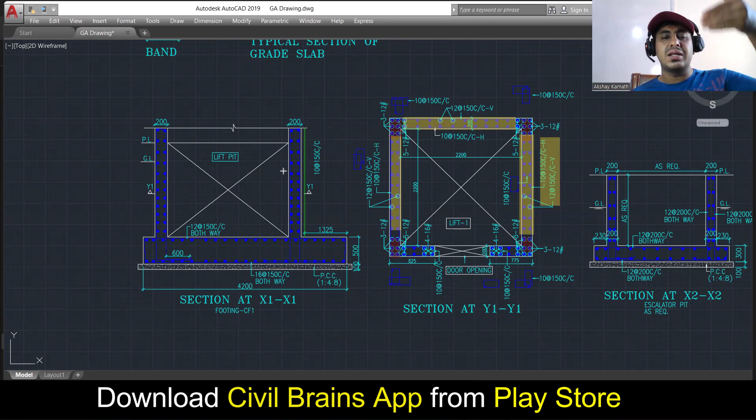So whatever is a wall reinforcement, that is mentioned here, how you are supposed to put the wall reinforcement. We'll see that. Same thing, they have shown that through a section here. Your wall reinforcement will be like this. And this wall reinforcement will go inside the column. Wall reinforcement will go into the foundation. This is how the bars will come. This bar will come like this. Okay, great, fine.

Now we'll try to understand here. Here you're supposed to provide a kind of a column. There you're supposed to provide 12 diameter. These are the 3 bars, and these 5 bars, 1, 2, 3, 4, 5. These are your 12 diameter 5 bars. So 5 plus 3 is 8 bars. Altogether, you will be providing 12 diameter 8 bars here, and then it will be connected with the lateral ties.

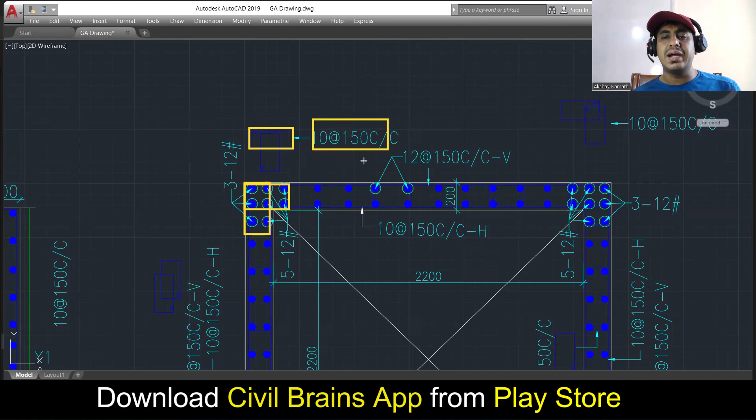So these lateral ties will be connected like this. This is one lateral tie, so it will be connected like this. Another lateral tie will be connected like this. So this is what you understand by this particular lateral tie. Which diameter? 10 diameter at 150 center to center spacing. Understood? In the same way, again here also the same thing.

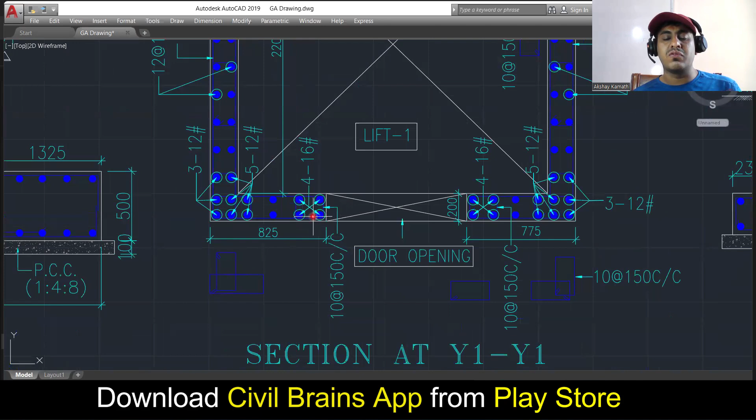So this much reinforcement you are supposed to provide. 5 and 3 is 8. So altogether 3, 3, 6 plus 2, 8. 8 number of 12 diameter bars you are going to provide. And then it will be connected with the lateral ties in this direction and in this direction, that is mentioned here. Same thing here also, another 4 number of 16 diameter bars you are supposed to provide here. 16 diameter 4 bars you will provide here.

This is a door opening from where you will enter into the lift. And then this is one reinforcement here, another reinforcement here. This is understood. Now come to the wall reinforcement. All these are your wall main reinforcement, which will come vertically, and then this will be a horizontal reinforcement. So that is why it's mentioned here that your main reinforcement, this one, is your vertical reinforcement. You can see the dotted bar shown here.

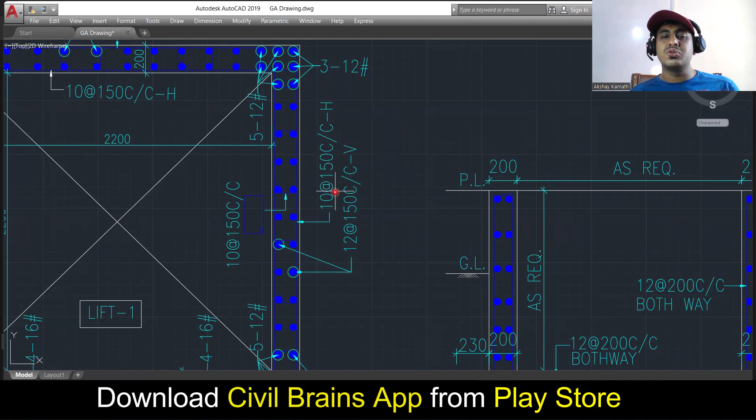You're supposed to use a 12 diameter bar, and the center to center between two verticals will be 150. V means it's a vertical reinforcement. H means your horizontal reinforcement. So vertical will go like this, horizontal will go like this. For horizontal, you're supposed to use a 10 diameter bar, and the center to center spacing will be 150. So it's written horizontal. That's it.

So whatever I explained to you in the previous video of my basement plus ground plus 3-story building, the same lift you're supposed to give. The only thing is here, at all 4 corners, your columns are going to come. Here also a kind of column reinforcement will come. That's it. Understood, right? Fine. So this was all about the lift reinforcement.

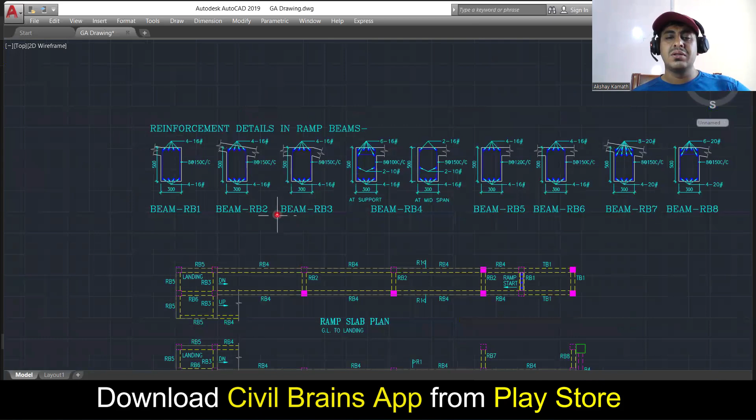Now we'll get into the plinth, this thing. What is that? Tie beam. Tie beam and plinth beam both are the same there. They have mentioned tie beam, that is fine. So for the tie beam reinforcement, you know how to read. I'll not explain it again.

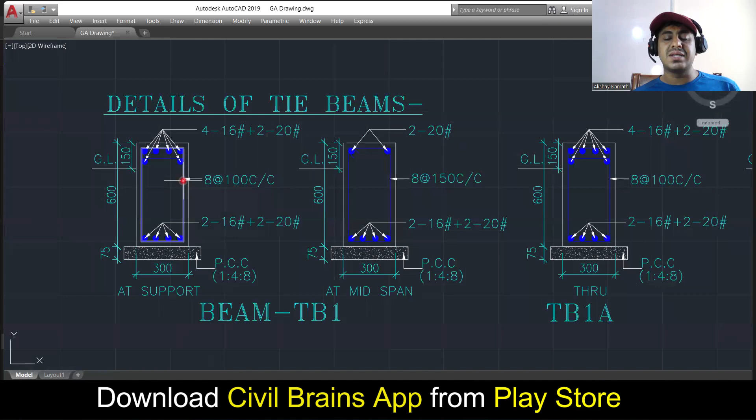Same thing here. Beam, tie beam, TB1. So you're supposed to provide a 16 diameter 4 bar at the top, then another 20 diameter 2 bar in the second layer. So all these are your 16 diameter 2 bar and 20 diameter 2 bar. So 20 diameter 2 bar will be at the outer face, and 16 diameter 2 bar will be at the inner face. This is your lateral ties, the stirrup, which you're supposed to provide 8 diameter bar at 100 mm center to center spacing. That's it.

Rest all things you know. You know how to read. I'll not explain the same thing.

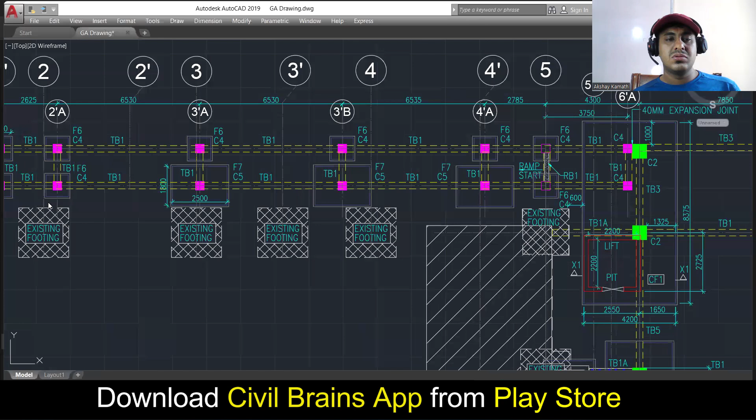Then after that, you are supposed to provide a ramp. So this is how the ramp will look. So your ramp will start somewhere from here. We can see here, so ramp is going to start here. So ramp will be something like this. Okay. So ramp will go like this always. Okay, ramp starts. This is how the ramp will look. And for that, they have given the reinforcement here.

This is a plan for the ramp. Your ramp is going to start from here. So it will go like this, and it will go up from here. Okay. So this is a ramp plan what they have given.

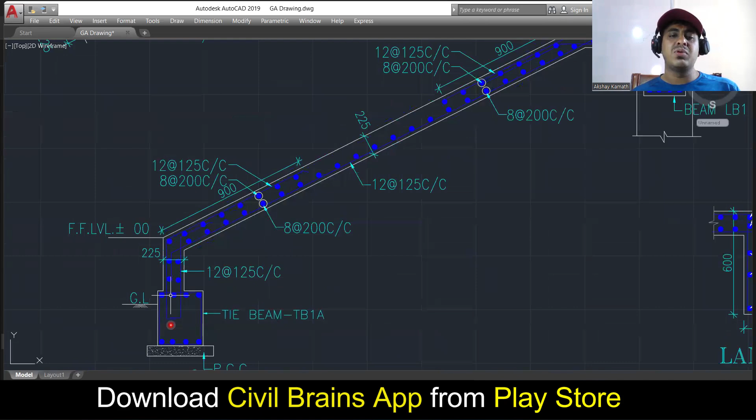This is your tie beam. From the tie beam, your staircase reinforcement will start, and we will bend it like this and take it like this. So since it's a big staircase, we have given 2 landings. One landing is here. Next landing will come in this direction. See, one landing is this one, then another flight and another landing will come here. Got it, right? So this was about the staircase details and the ramp details. And apart from that, that's it.

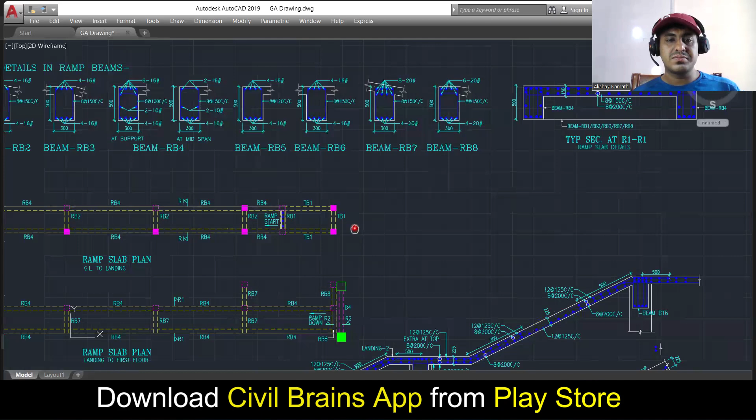Okay, so this was all about the tie beam details and staircase details I've explained to you. Everything is covered, nothing is left out. And last we'll go to the slab details. So slab details, already I've explained you many types of slabs. So here again, this is a complete slab plan, what they have given. So these are the different slabs what you have.

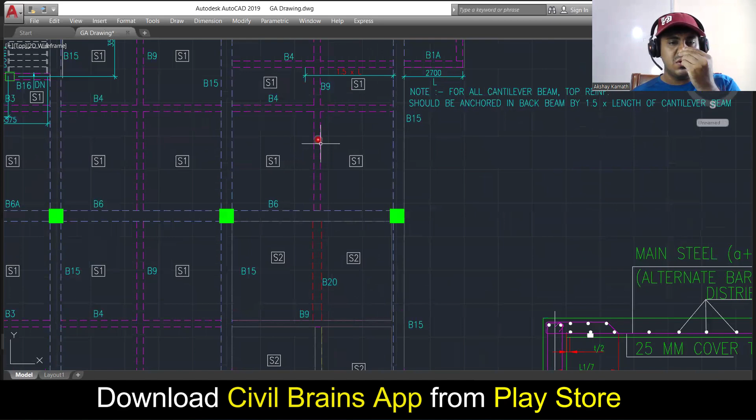See, all these are the beam layout, B1, B2, B3 and all. And everywhere the slab is given, like S1, S1, S1 is one group of slab. Apart from S1, we have another group of slab, that is S2. So for everything, they have mentioned it here. If you're using an S1 slab, the thickness should be 150. If it is S2 slab, it is 150. Both are two-way slabs only.

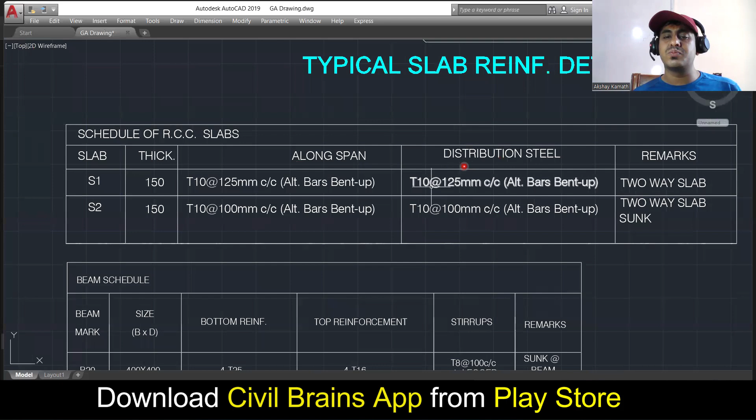And then he has given along the span, you're supposed to use a 10 diameter bar at 125 center to center, alternate bars bent up. And your distribution steel, or along the longer span, you're supposed to provide 10 diameter bar at 125 center to center spacing. Then he has mentioned how your bar will go.

Your slab reinforcement will start like this, come like this, give a crank and take it down like this. This is one reinforcement. Next reinforcement, you start like this, bring it here, give a crank and take it like this. After that, your next reinforcement will start from here. It will go like this, give a crank and take it to the next panel. And from the last panel, it will come like this, give a crank and take it here.

Understood? So these things I had explained in the initial lecture, that this is how the slab reinforcements are given. I'll show you one image also to put it in a better way.

So this is how the slab reinforcement will look. Last time I had explained you. See, this is one panel, this is second panel and third panel. So first from here, you'll start the top bar, you'll give a crank, you'll bring it like this. So this way you are going to arrange the bar. Then from here, your bar will start, you give a crank and take it here. Okay. So now what happened? This spacing is fine. This spacing is, let us say 125, 125, 125, 125.

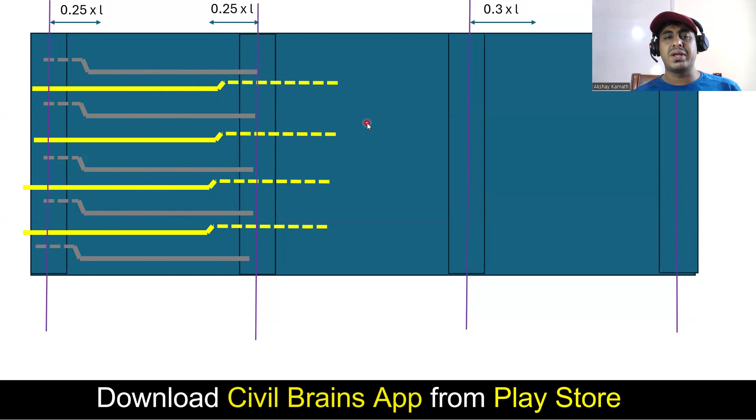So one panel I finished. I'll go to the second panel now. So since you have stopped the bar here, from the top of this bar, I'll start my next bar. So it will go like this. My crank will start from here, bring it down and take it like this. Now this spacing is doubled, so I need to decrease the spacing. So I'll start another bar from this direction. So my bar will start from here, give a crank and take it to the top. So this is 125, 125, 125, 125, 125 spacing.

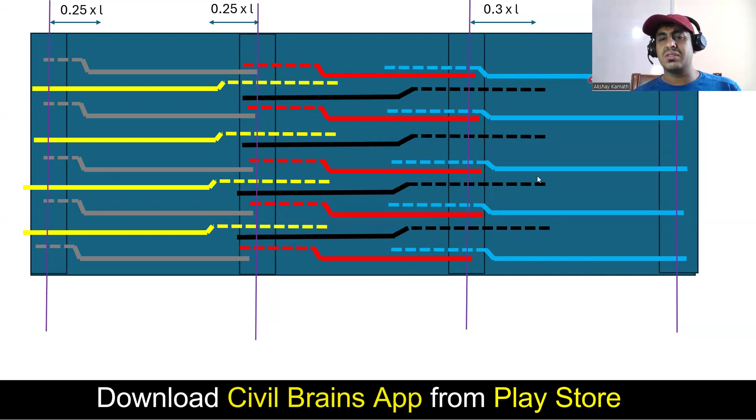Then again from here, since this is bottom bar, from here I'll start my next bar, give a crank like this and take it here. Okay, this crank should have come little on this side, but it's okay, no problem. Somewhere it should have extended, it's okay. Then next bar I'll start from here and give it. So this is called as alternate bent up bar. Okay, giving an alternate bent up.

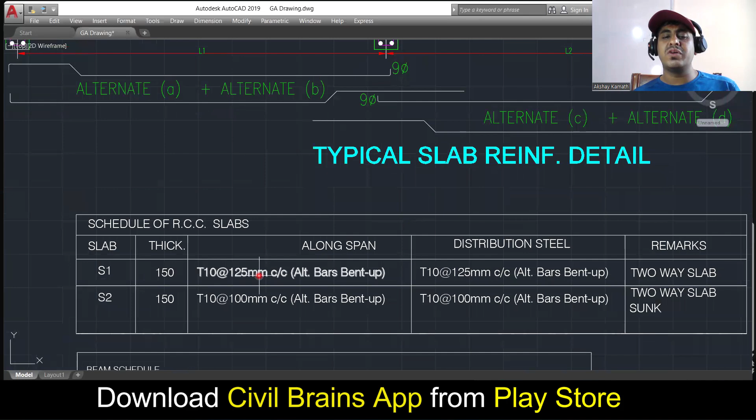Now one bent up is here, coming, you're giving a crank, you're going to bring it here. Next, you're starting from here. So alternate bent up, alternate crank, both are one and the same. Few people call this as bent up bar. Few people call this as a crank bar. The meaning is same. Okay, understood, right? So this is how the reinforcement is supposed to be provided on that particular slab, and that is what is mentioned here. So 10 diameter at 125, you're supposed to provide. Wherever you have S2 slab, there you're supposed to provide 10 diameter, 100 mm center to center spacing. Same thing, you can see it here.

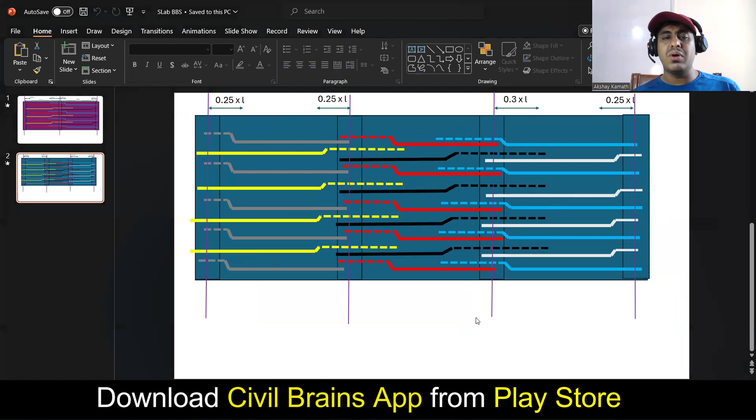Only the difference, sometimes what people do, see, in my slab, I haven't given this bend here. If you observe it carefully, I haven't given this bend here. But usually this bar should be bent like this. It has to give a small bend and it has to bend like this. Okay, it has to start like this. It has to get a bend like this and start. But I didn't give that. But practically, that is how you're supposed to give. And how much should be this bend? This small bend, what you have done?

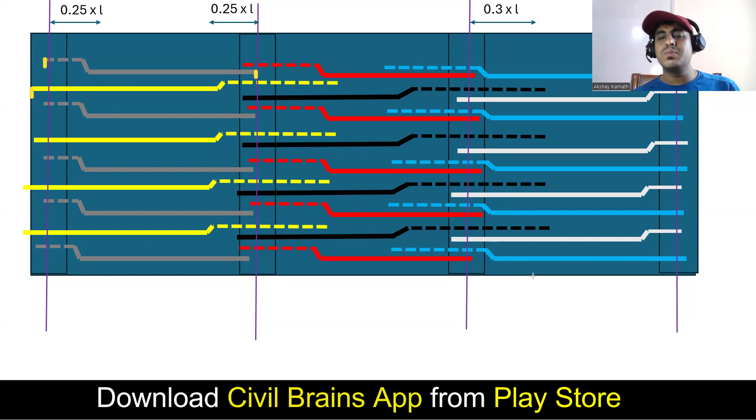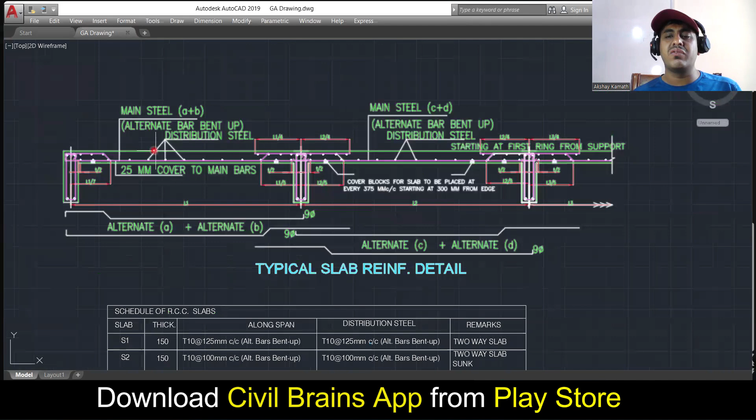No, it should be 8 times the diameter of the bar. Few people keep it as 9 times the diameter of the bar also. Here he has mentioned that this particular bend, what you're doing, this one, has to be 9 times the diameter of the bar. Suppose if you're using, let us say, a 10 diameter bar. So 10 into 9 is 90. So this bend, you have to keep 90 mm. So practically, this is how you're supposed to do it on site. Okay. And then all these things are mentioned, which is already covered in my lectures, what is L/7, where you have to do L/5. Okay. So try to go through this.

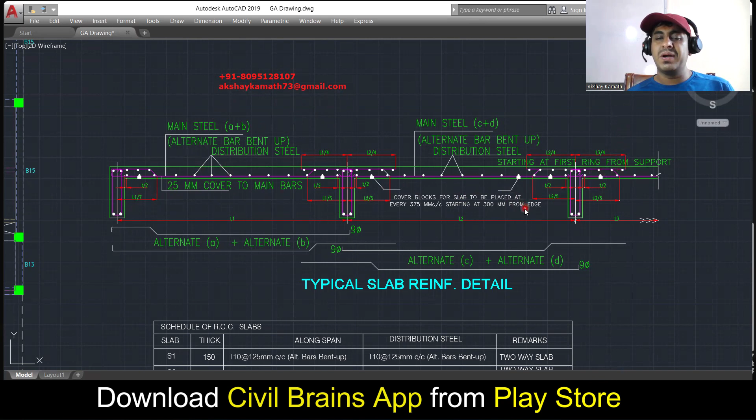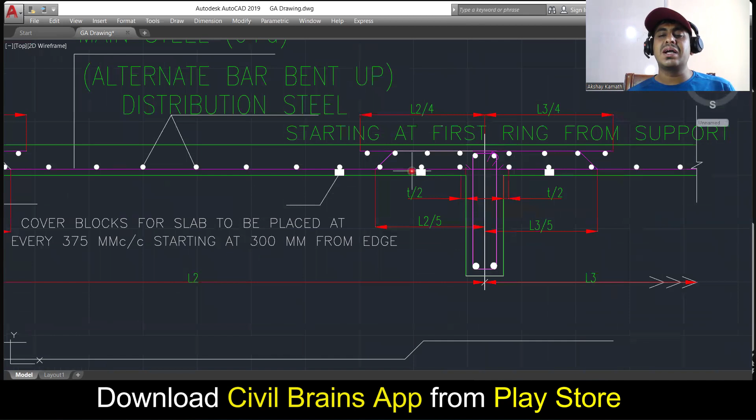And then he has mentioned that whatever cover block you are keeping, see, this is cover block. Cover block for the slab to be placed at every 375 mm center to center, starting at 300 from the edge. That means, see, usually cover block we randomly keep it. We make sure that none of the reinforcement is touching the slab centering. So there is no certain rule for what spacing you're supposed to keep. But here he has told that the center to center distance between your cover blocks should be 375.

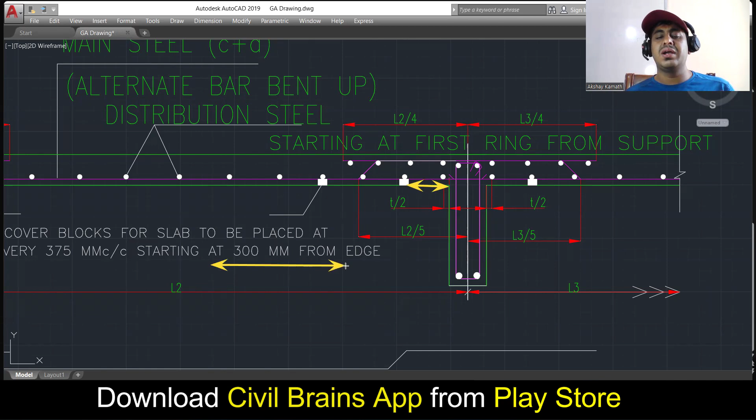And the first cover block you're keeping from the face of this beam support should be at 300. So it's trying to tell that this should be minimum 300 mm. Not minimum, maximum it has to be 300 mm. The first cover block you're keeping from the face of this beam should be 300 mm, starting 300 mm, not more than that. Max to max, you can keep at 300. Not more than that.

Understood, right? So I hope you have enjoyed this lecture up to here. You have got an idea of how to understand the slab reinforcement and all. Almost everything I have covered here. Again, I'll repeat the same thing: in spite of that, if you have any doubt, you can always get back to me.

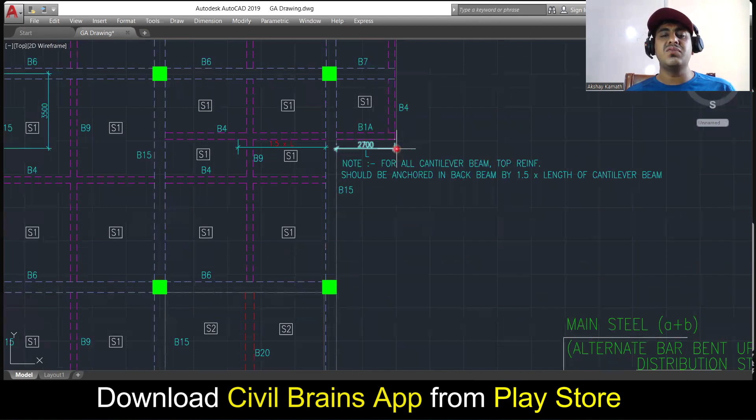One last thing we'll try to understand. See, here he has mentioned for all the cantilever beams, top reinforcement should be anchored in back beam by 1.5 into length of the cantilever beam. What is it trying to tell? This particular beam is my cantilever beam. I'll draw it. So in the cantilever beam, the reinforcement will be a top reinforcement. Since your tension will be at the top, you cannot stop this bar here. This bar has to be taken sufficiently back.

How much back are you supposed to take it from the face of this beam? You have to give at least 1.5 times the L. Now, what is L? L is the length of this cantilever beam. So let us say the length of your cantilever beam is 2700. The calculation is 2.7 into 1.5. Try to do the calculation and tell me what answer you are getting. So 1.5 into 2.7, 4.05. So 4.05 meter you have to back anchor your reinforcement.

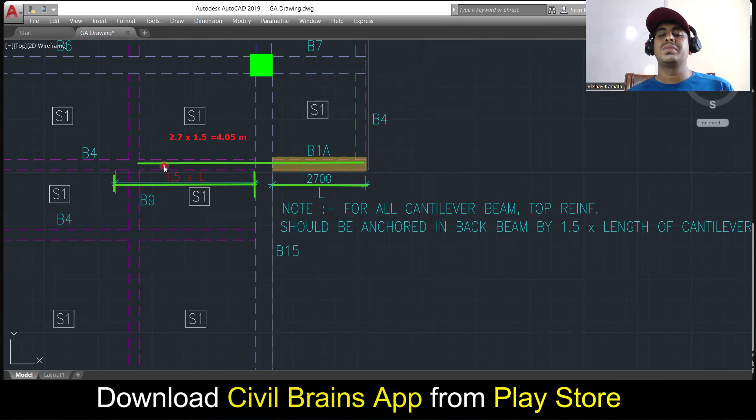So this cantilever reinforcement should be continuous from here. From here you will start the bar, so this will be a top reinforcement. But from the face of this beam, it has to go up to 4.05 meter. So it's written here it should be back anchored in back beam by 1.5 times the length of the cantilever beam. Why does it have to be done? Again, for the very same reason, since it's a cantilever beam.

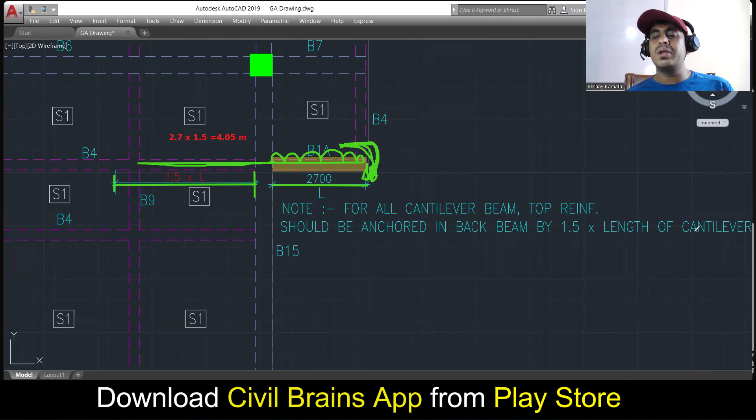Because of the moment, because the force is going to come, we'll have a UDL coming on this. This UDL will create a moment here, so it will try to bend this cantilever beam. Whenever it's trying to bend this cantilever beam, at the back I should have enough support so that it will not fall. If I don't have proper back support, this may fall. This was explained in my site engineer course with an example of an eraser and a scale.

For example, let us consider, how shall I do that? Suppose this is my column. And on this column, I'm keeping one scale like this. So this is the scale that I have.

So now let us say on this I'm keeping some weight. This is a weight what I have. It is applying a weight. So now what will happen? This length, whatever I have, this length is more, and this length is small length.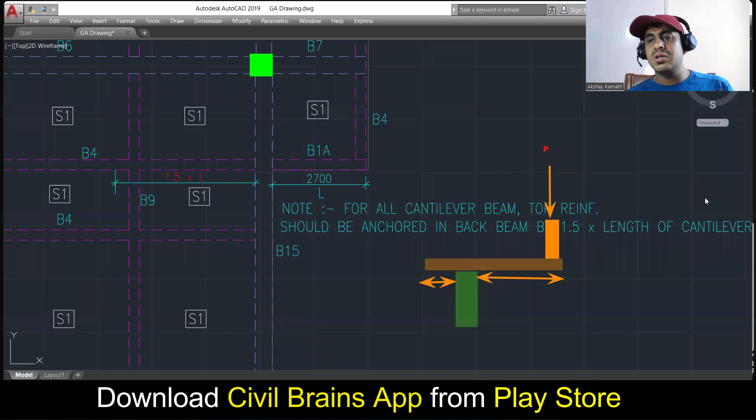So what will happen? Let us say this particular force is P force. This P force will try to rotate because it is getting a length from here. This P into this distance I'll consider to be L. So this P will try to rotate like this. So P into L, the moment is created. Whatever moment is created, that much resistance it has to offer from here. So let us say this particular length is L dash.

Whatever is the unit weight of this particular beam, that unit weight has to resist this much amount of moment. So this is my restoring moment, or resisting moment. This resisting moment should be more than this moment. If it is not more, then this will try to topple like this. It will try to overturn. That is why we have to keep our reinforcement in such a way that this back anchorage should have enough length.

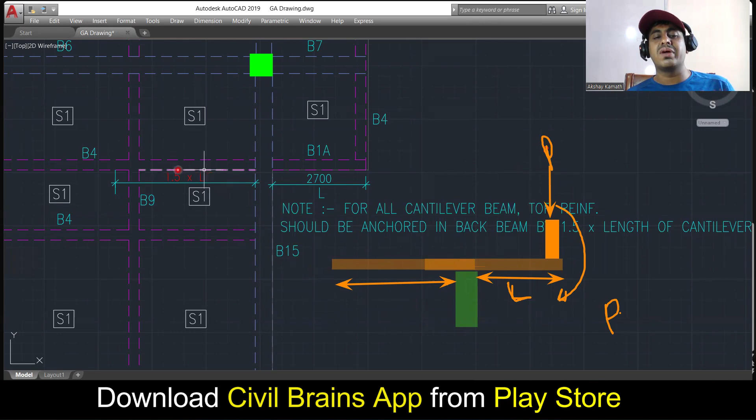If it has enough length in the backside, then it will have more area of concrete here, and this length is also increased from here to here. So whatever moment it is trying to create, this resisting moment will be more than that. So it will have a balance. It will not try to overturn. That is why this back anchorage is required.

So I hope you got an idea regarding the back anchorage length. Nothing, just you have to increase the reinforcement. Anyhow, it will have a continuity in the back support, so it will not affect much. Only the thing is the reinforcement you're developing in your cantilever beam has to go enough back.

It has to go backside. You should not stop your cantilever reinforcement like this. You have to extend your cantilever reinforcement up to 1.5 times the L. Up to here, you have to develop. That's the main intention of this point.

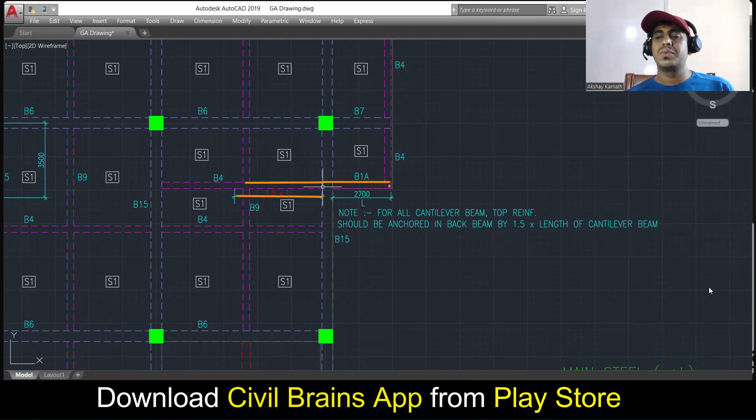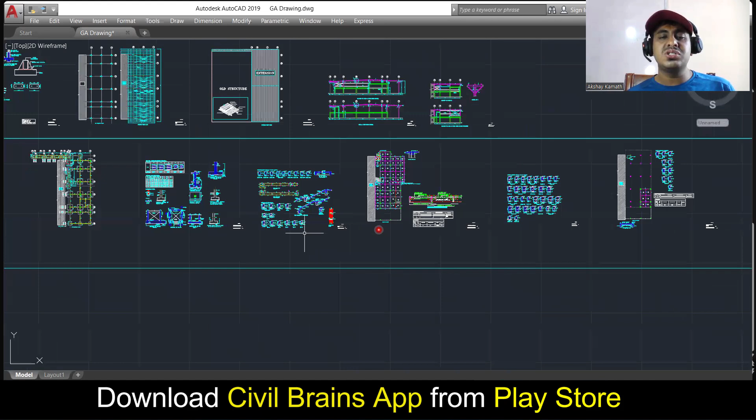I hope you have got an idea regarding how to understand this particular drawing, how to understand the beam details and all. Each and everything I've covered here. And this is the last level. It's a slab plan. There the slab thickness is 150 and the reinforcement is given, which you already know. So this way we have finished the entire structural drawing part. All these things are covered.

One more point is there. Here it's written typical details of a hanger bar below the secondary beam resting on the main beam. This thing and this thing I'll cover in the next lecture. And then we'll try to understand structural steel drawing.

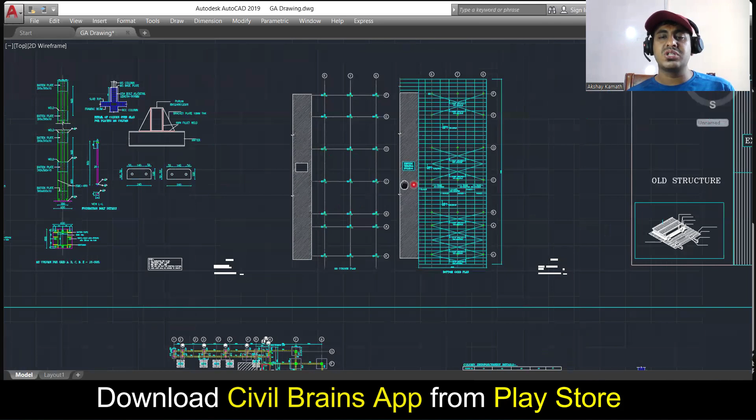I don't have much knowledge about structural steel, but whatever basic knowledge I have, I'll be explaining in the next lecture. Next lecture, I'll start from this point. It's a very important point which we need to understand.